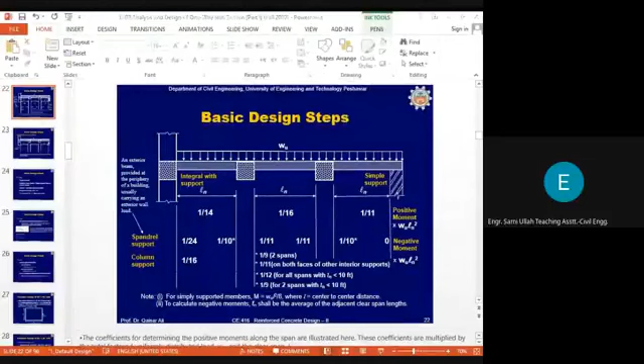Provided that the beam is subjected to uniform distributed load, just like this case. So for the design, you need to know the bending moment diagram at the midspan and at the support, and bending moment at the support is negative and at midspan will be positive. So for every span between the supports, two bending moment values are to be determined from the analysis.

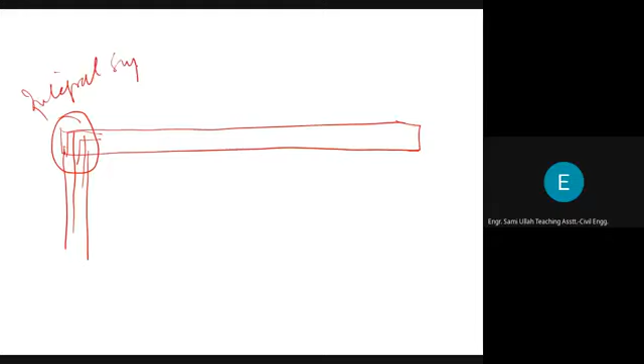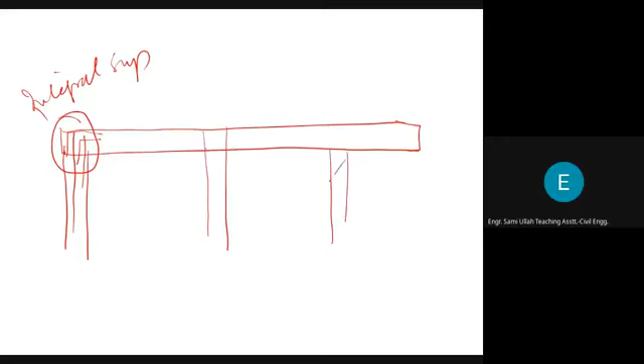Then let's say there is another column here, there is a wall here, and at the extreme end also there is a wall. So at the extreme end here, the beam is just supported on the wall. There is no connection between the wall and the beam. This is called a simple support.

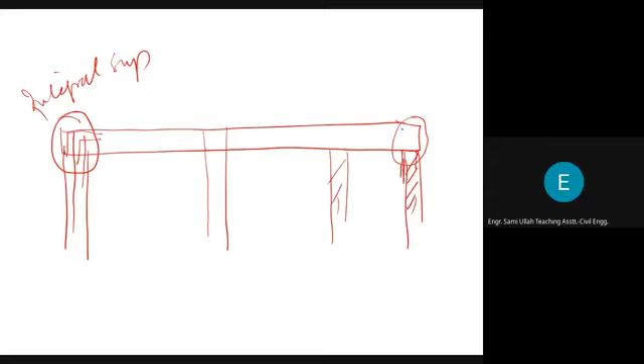This is called integral support because at the other end, the beam and column are integral to each other. The integrity is provided by the reinforcement of the column going into the beam, and the beam reinforcement coming down into the column, so that this connection of the beam and column is made integral by reinforcement continuity of one member into another. So this is integral support.

If the support is integral, for this exterior beam span, the value of the positive bending moment will be 1/14. And for this span where the support is simple, this positive bending moment value will be 1/11. The bending moment diagram will be like this.

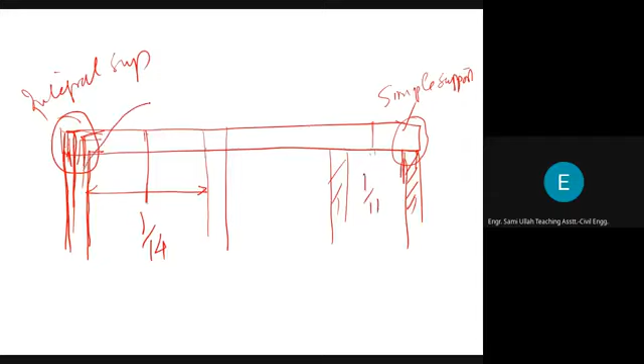There will be zero bending moment here, because a simple support or wall, the wall and beam are not integrally connected. So there will be no negative bending moment, and zero bending moment here, and the positive bending moment value will be 1/11. And here it will be 1/14.

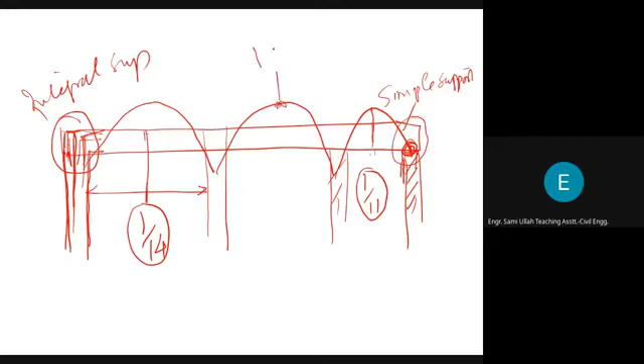Anywhere in between, for all interior supports and all interior spans, the value of positive bending moment will be 1/16 WU L square N.

So the difference in positive bending moment for the exterior span is due to the exterior supporting system. If the exterior support is integral, the value will be 1/14. If the exterior support is simple, the value will be 1/11. And for all interior supports, for all interior spans, the positive bending moment value will be 1/16.

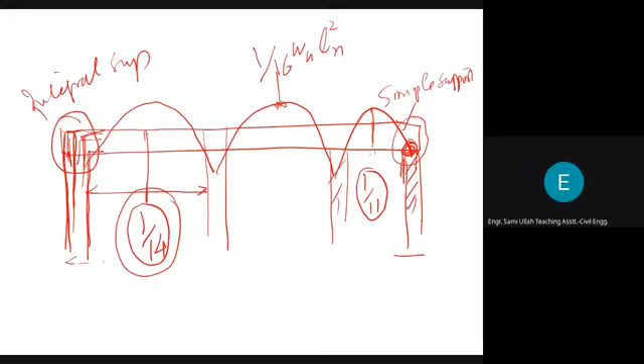I hope this is clear. Okay, if still there is some problem, you can ask again.

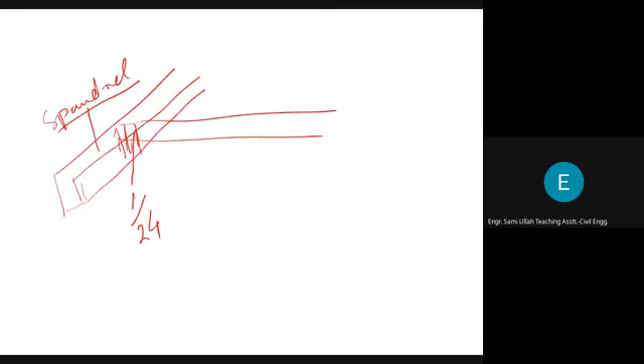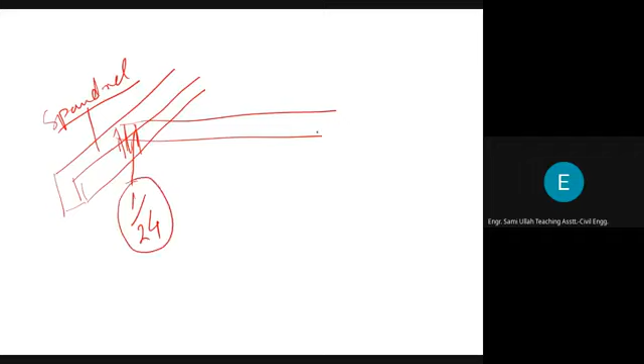And for this case, the negative bending moment value will be 1/24, not 1/16, because the extent of integrity between a beam and another beam is less than a beam into a column. So for this reason, the negative bending moment value is reduced from 1/16 to 1/24. This is called a spandrel beam, the perimeter beam.

So it is quite possible that sometimes a beam terminates into another beam instead of terminating into a column. If a beam terminates into another beam, then the beam where this connection is provided will have a negative bending moment value equal to 1/24 instead of 1/16. This is the spandrel beam situation.

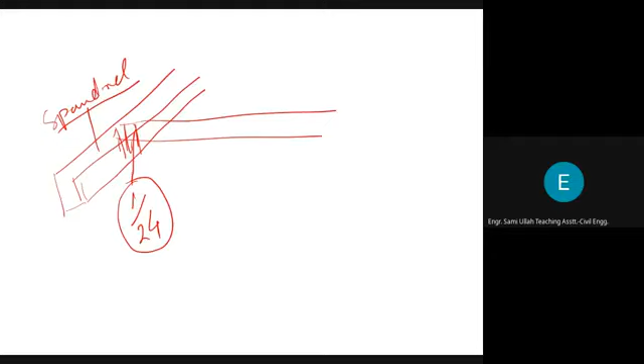Anything else on this slide? No, time, sir. Thank you, sir.

Next time, I will try to develop several situations which will almost encompass all these bending moment values for different scenarios. So it will further facilitate your understanding of these negative and positive bending moments.

And if you try yourself, develop several situations: a beam terminating into a beam, into a column, beam on the slab, and assign these bending moments to the situation you are considering. It will make your understanding better in this approximate procedure for analysis.

And if still you have any problem, you can ask questions. Okay, next, any other question please?

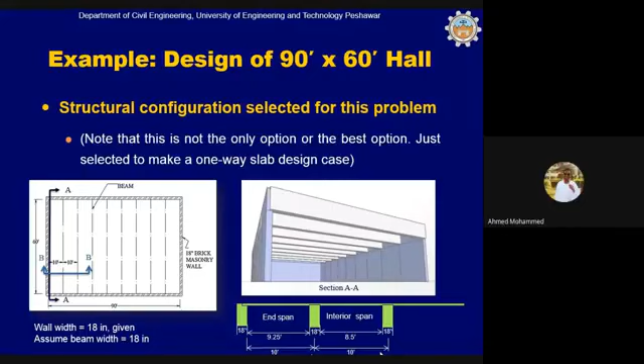Yes, this one? The first step, slide number 16. Yes, Ahmad, please ask your question. It says sizes for all structural and non-structural elements. What does it mean by non-structural elements?

Non-structural elements, yes, like walls. For example, a wall in a frame structure - when we construct and design a frame structure, the walls are non-structural elements because no load is transferred through walls, and walls just act like partition walls. So all those elements which do not take part in the load transfer mechanism are called non-structural elements, such as walls in a frame structure, partition walls, like this.

Roofs as well - what about roofs and floors? If a wall is a load-bearing wall, part of a load-bearing wall system, just like in our residential buildings and homes where the slab is supported on walls, then the wall will be a structural element, not a non-structural element. That meaning, we mean by non-structural those elements which are not transferring any loads. Yeah, you're right, okay, that's it.

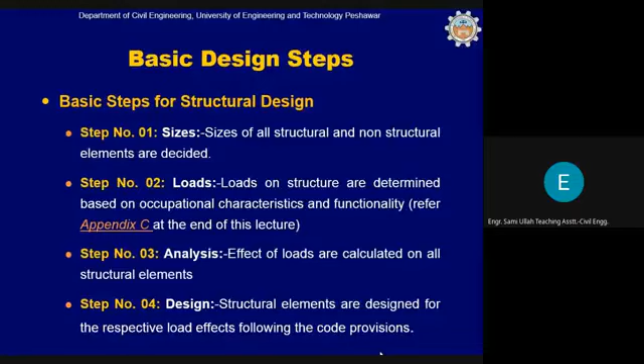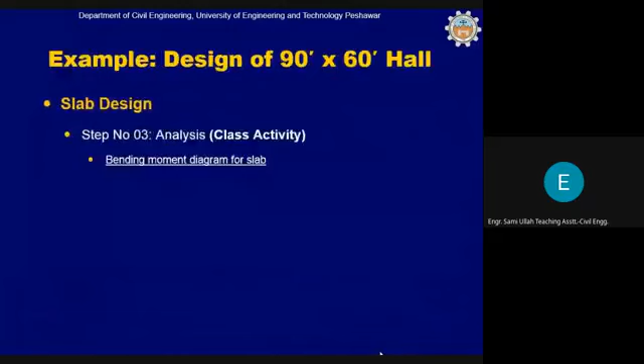Thank you sir. Yes, anything else? Anyone else with any other question? Okay, if there are no questions, then I think let's begin the remaining part of this lecture.

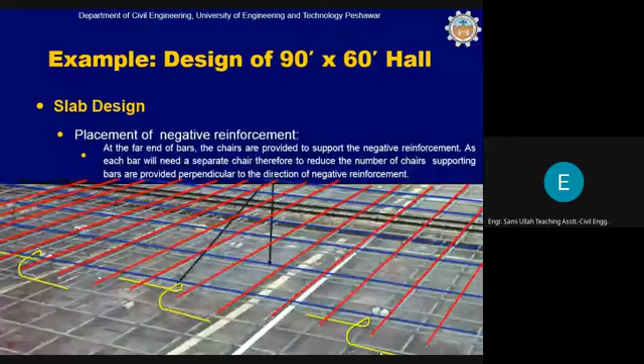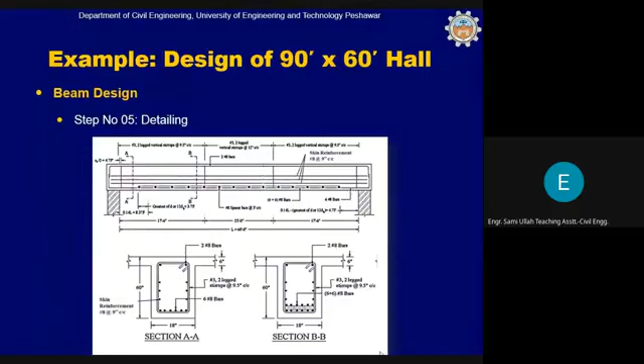Okay, so now the next part of this lecture. In this design example, which is the previous design example you already completed in the previous lecture, the beams were supported on walls. This was done to simplify the analysis. You know this was a big hall, 60 by 90 feet is a big hall, okay, and such halls are usually designed for gymnasiums and wedding halls, maybe sometimes a mosque or something like this.

And such big halls shall not ideally be supported on walls, because of the weight of the slab and the beams. You can see that the beam is 60 inches deep. Excuse me, just a moment.

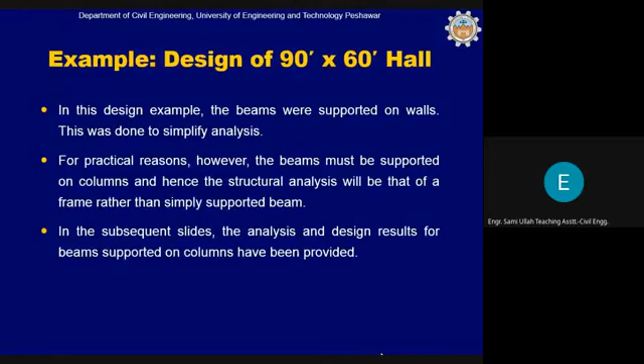So in this case, the structural system will look like this. Can you see this slide clearly? Yes sir. Okay, now what is the difference in the two cases?

In the previous case, there were no columns. These columns were not existing. The beams and the slab both were supported on walls here - there was a continuous wall here, and a wall on this side as well. So this beam we were designing was basically supported on both ends on wall, and that's why we call this a simply supported beam, and we analyze this using WL square by 8.

There will be walls in this case also, but they will be partition walls only, between these two columns - partition walls, partition walls. So the walls will not take part in the load transfer mechanism; these will be just non-load bearing walls transferring no load except its own weight to the ground. When I say they do not transfer, I mean they will not transfer any load from the structural system to the ground. The load path in this case will be like this: the slab load will be transferred to beams somehow, and then this load will be transferred to the column, and from the column the load will be transferred to the footing foundation, and from the foundation to the ground.

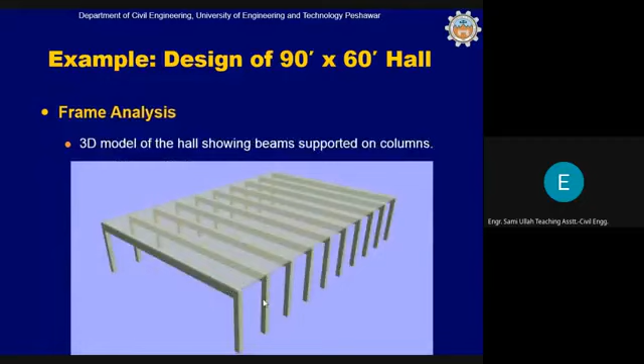However, there is a difference in the column and beam analysis. If we convert this 3D system into a 2D frame, it will look like this: a beam resting on two columns. Center to center, the distance of the beam is 61.5 feet, and WU, the ultimate load on the beam, will remain the same because we are only changing the supports - it will be 3.355 kip per foot.

Now, will there be any change in the analysis and design of the slab? I'm asking this question from you. Will there be any change in the analysis and design of slab? There will be no change, because the length of the slab is the same and the support conditions are almost the same.

There will be change only in the analysis of the beam, because the support for the beams is being changed. In this case the beam is supported on columns, and the analysis will be done using frame analysis. You would have several times analyzed single bay frames like this, with a beam subjected to uniformly distributed load, resting on a column. You can use any method of analysis for this, but you should use the exact method of analysis, not the simple approximate method.

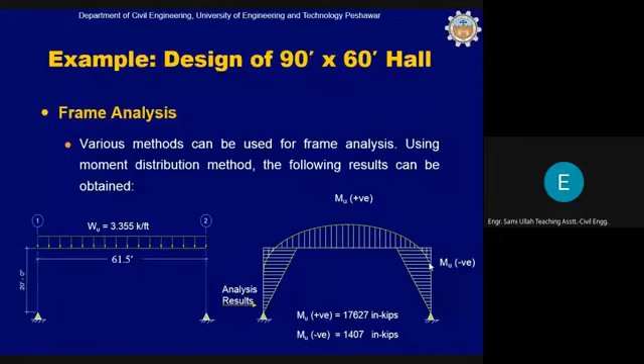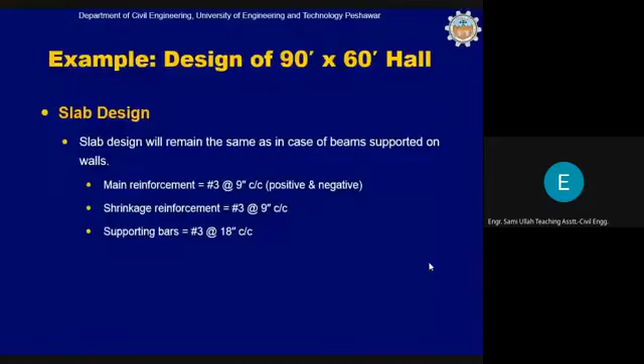We will just quickly go through the beam flexural design, because we have already designed the beam for positive bending moment, so it is not difficult. You already know the steps of design for positive bending moment. First of all, you will have to determine the effective width of the beam, which you have already determined in the previous case. It will remain the same, it will not change.

Just the value of positive bending moment has changed from 19,000 to 17,000, so the reinforcement will slightly decrease. And the negative bending moment value of 1407, which is at the connection of beam and column, is a new bending moment in this case, and you can design for this negative bending moment. If you do this yourself, finally you will find that for positive bending moment it is 8.68 square inch reinforcement, and for negative reinforcement it is 0.69 square inch.

Then you can use several arrangements of reinforcement. You can try 6 number 8 bars in the first layer and 2 number 8 plus 4 number 7 bars in the second layer, just to reduce some area, because in the previous case it was 6 number 8 and 6 number 8, 12 number 8 bars. In this case, since the difference in reinforcement is very small, from around 9 to 8.6 square inch, we are trying to reduce some reinforcement. So we use 6 number 8 in first layer, 2 number 8 at the corners in second layer, plus 4 number 7 bars in combination in the second layer.

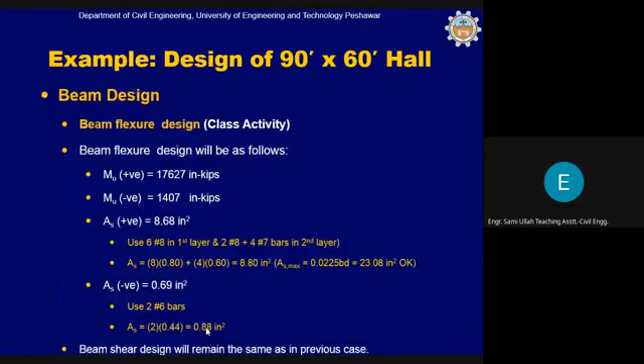Next is the design of column. From the analysis, we have calculated that at the beam column connection, there is a negative bending moment which will be transferred to the column of 1407 inch-kip, and the ultimate load coming from the beam is 103.17 kip. So the axial load diagram will be like this, and the bending moment diagram will be like this. Now we can also design this column.

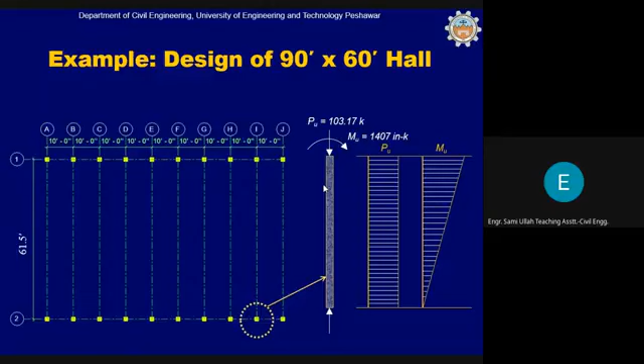The column size we've assumed is 18 inch by 18 inch, and I hope you remember this method of column design using the ACI design aid. It is very simple: you know Pu and Mu coming from the analysis. Calculate the ratio gamma for 2.5 inch cover. Gamma equals H minus 2C divided by H. C is 2.5 inch, so 18 minus 5 divided by 18 is 0.72.

So you should select the relevant design chart. Kn value is Pu divided by phi FC prime AG, and Rn is equal to Mu divided by phi FC prime. Everything is known: phi is 0.65 for tied column, FC is 3 KSI, AG is the gross area of the column, which is 18 by 18 in this case, so column size is 18 by 18. Rn is equal to Mu, the bending moment 1407, divided by phi FC AG H.

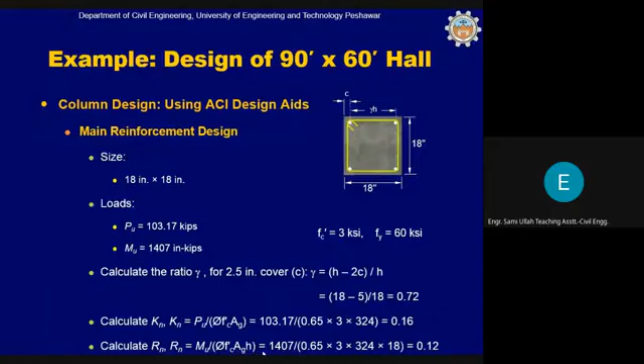So once you determine these two values, you select the relevant design chart, interaction diagram. From the interaction diagram, these two lines meet here, which corresponds to around 1%, slightly more than 1%, or exactly 1% of the reinforcement.

So 1% of the reinforcement is the minimum requirement of the ACI code. This 1% of reinforcement means 1% of the gross area of the column, and the gross area of the column in this case is 324 square inch. 1% means 0.01, so the reinforcement required is 3.24 square inch. 3.24 divided by 0.44 will give you a reinforcement of 7 bars or 7 point something bars.

As you know, we cannot provide 7 bars in a square column. We must provide a number of bars which should be a multiple of 4. So we round this to 8 bars. This will be 8 number 6 bars, and it will be like this.

3.24, if you want to calculate the area, divided by 0.44 - this is the number of bars, n. Calculate these bars: it comes out to be 7.36 bars. 7.36 bars are required, so we will round this to 8 bars.

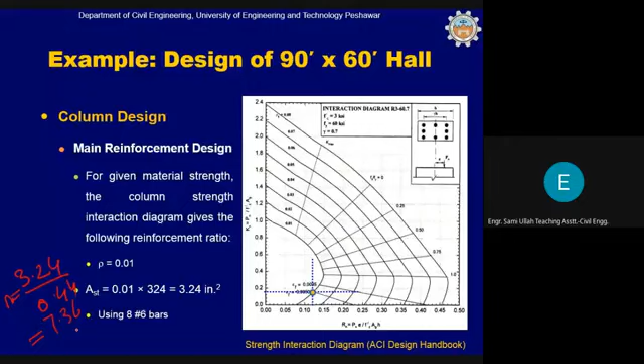Finally, we decide to use number 3 bar at the rate of 9 inch center instead of 12 inch center, further reducing the spacing between the ties.

This will be the drafting of the column: 8 number 6 bars, you can see 8 number 6 bars. Then you can also see number 3 stirrup at the rate of 9 center to center. This is the cross-sectional elevation, and this is the plan cross-section of the column.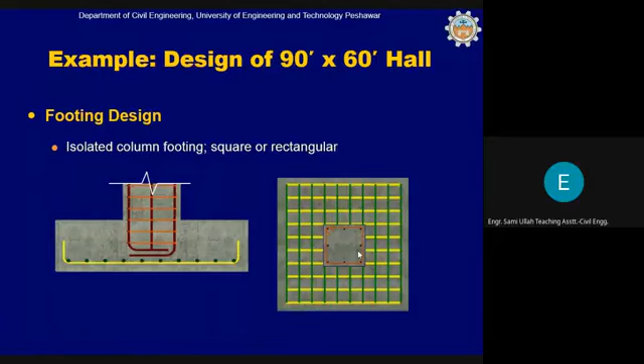A reaction at the support should be used in the design of footing - the factored load on column reaction at supports. After you finish your analysis, when you do the frame analysis like this, you will finally determine these reactions, and these reactions will be applied as load on the footing.

Okay, these reactions will come from the analysis. For the size of footing, you would require ultimate load as well as service load. The analysis is usually done with service loads, and finally they are factored to calculate factored loads and factor bending moments. Service load on the column is 81.87 kip without factors, and factor load is 103.17 kips.

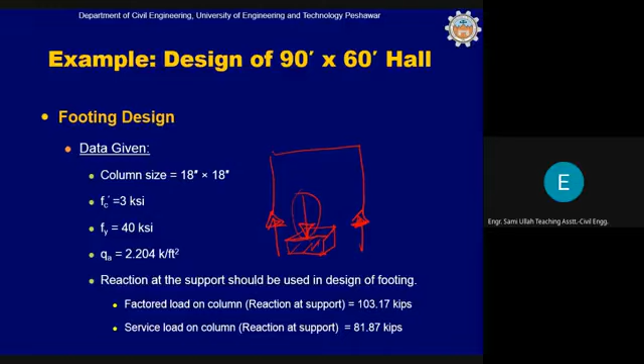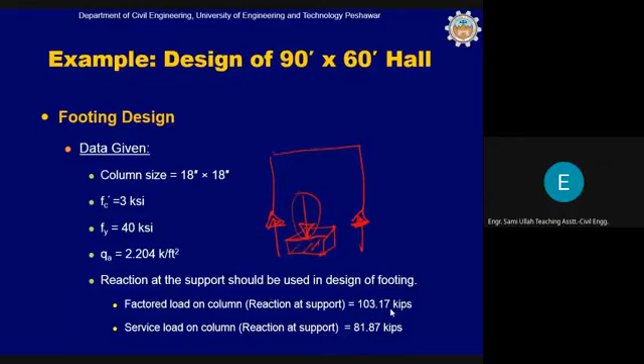In the beginning, we should assume some thickness of this concrete pad, isolated column footing pad. This H is 15 inch. If you remember in the previous course, we said that the thickness of the footing shall not be less than 12 inch because of the requirement of cover, 3 inch cover. So if 3 inch cover is required, the effective depth will be substantially reduced. For this reason, normally the footing thickness for isolated column footing is taken as 12 inch. In this case, we have chosen 15 inch thick plate, though you can also choose 12 inch thick footing plate.

The average D, why are we writing D average? Because the reinforcement will be provided in both directions, in this direction as well as the other direction. Since it's a square footing, we'll design only one reinforcement along one direction. And since the effective depth will be different, because one layer will be placed in this direction and the other layer placed on top of this, the effective depth will differ for the two directions. For this reason, we use the average, and when we calculate the reinforcement using that average, it will be provided with the same spacing in both directions.

Total thickness of the footing is H, clear cover is 3 inch, and let's assume in the beginning that number 8 bar will be used. So with a number 8 bar placed like this, the average means the contact point of these two layers. The contact point means that one complete bar diameter will be added with this 3 plus 1 inch, and this total D is 1 inch, which is the diameter of one bar. This will be deducted from this for D average. This will come out to be 11 inch.

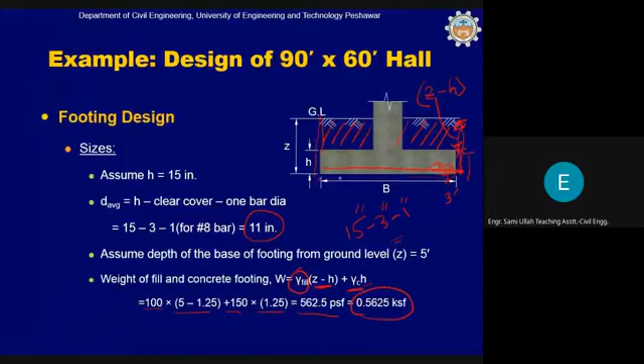And the bearing area is service load divided by QE. Service load is given as 81.87, unfactored load, divided by this effective bearing capacity. So the required area is 49.86 square feet, and the square root of this will become around almost 7 by 7 feet foundation.

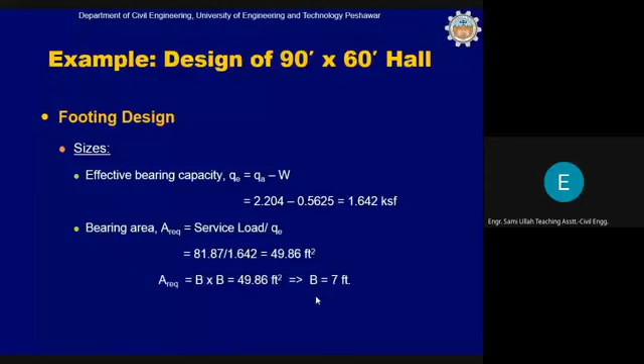Next is to determine the critical perimeter in order to confirm the thickness that we will assume, because the thickness of the footing pad will be governed by the punching shear criteria. The punching shear criteria will basically determine the thickness of the footing.

So for punching shear, this critical perimeter is calculated. This is the yellow perimeter line. We know that if column size is C, and this part is D by 2 and D by 2, then this length of the yellow side will be equal to C plus D average. There will be C plus D, C plus D, C plus D. It will be 4 into C plus D. We know that column size is 18 inch and the average effective depth of the footing is 11 inch.

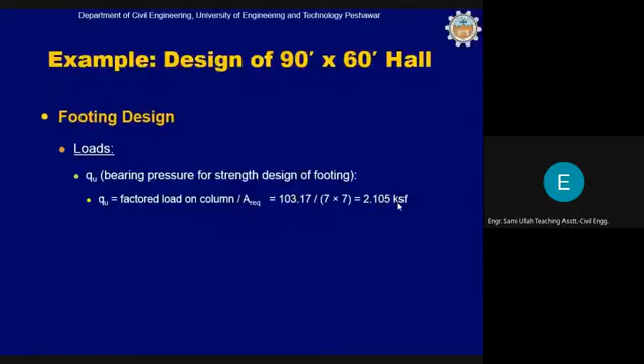By the side, because when this column takes all the load from the beam, it will transfer this load to the foundation, and the foundation pad will transfer this load to the soil. The soil, in turn, if it does not settle, will resist this load, and when it resists this load, this pad will be lifted up from the sides. Because the load is coming through the column, it cannot lift the whole column, but it can lift the far ends of the pad. So the far ends of the pad will be lifted up, giving rise to a negative bending moment at this edge of the column.

Similarly, when the column tends to transfer this load through the footing pad to the ground, there is a possibility of making a hole in this footing pad, just like a needle resting on paper. If you push a needle through a piece of paper, it is likely that the paper will be punched or a hole will be made, unless you increase the thickness of the paper. If you have considerable thickness, it will be difficult for the needle to make a hole when pushed through. In the similar manner, we increase the footing depth in order to avoid this punching of the column into the pad, or making a hole in the pad.

So this is avoided in this manner. The punching shear value can be calculated from this equation: Qu times B squared minus Qu times C plus D average squared. Instead of calculating this punching shear value at the face of the column, we calculate it at a distance of D by 2 from the face of the column, because the hole will be made at the boundary of this red area, not at the face of the column.

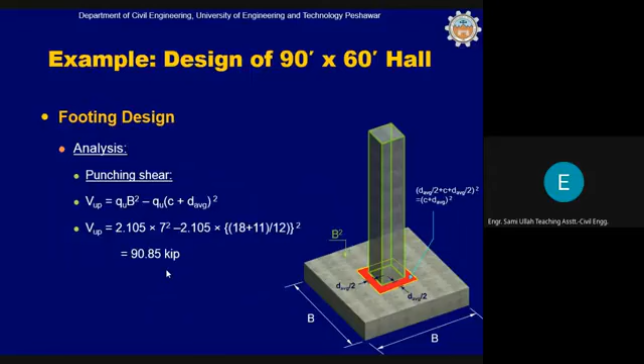The bending moment is calculated by this equation, Mu equals QuB k square divided by 2. How is this done? You know this is a square footing, so the bearing pressure per square foot is QU, and if you want to calculate bending moment at this location, we multiply this QU with B in order to calculate the bending moment per foot, load per foot in this manner. QUB, this is the load now in the upward direction.

And the bending moment will be calculated at the face of the column. So this QUB is the load acting in the upward direction, and MU here can be calculated very simply, QUB times K into K divided by 2, just like a cantilever beam.

So this bending moment is QUB K square by 2, and K is basically the distance from the face of the column to the far end of the footing, which is B minus C. B is the total width of the footing, and C is the size of the column. So K will be equal to B minus C divided by 2.

Because this total distance is B, and this is C. So B minus C will be the remaining distance, and this will be B minus C by 2, and this will be B minus C by 2.

The bending moment is calculated at this location: QUB into K square divided by 2. Because when the column tries to push this pad down, the pad will move up like this, giving rise to a negative bending moment at this location.

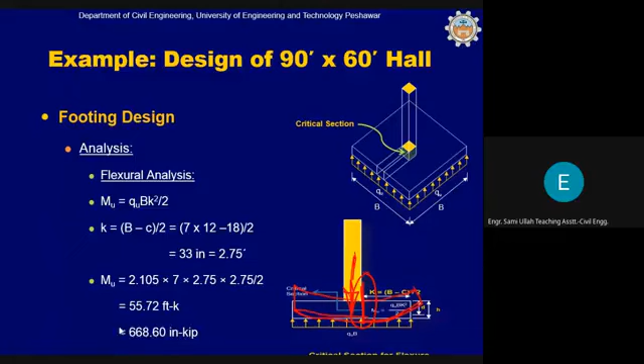B naught is calculated in the previous slides. D average is 11. Divide by 1000 will give you the value in kip. So phi 4 root FC prime B naught D average is 209.66 kip, which is greater than the VUP, the shear demand. So the assumed thickness is enough, or even it is slightly more than what should have been assumed.

So if you want to, you can reduce this a little bit from 15 inch to 12 inch. So there is a slight margin of reduction in the thickness of the footing. Anyway, we are not doing this in this example. We keep our thickness equal to 15 inch.

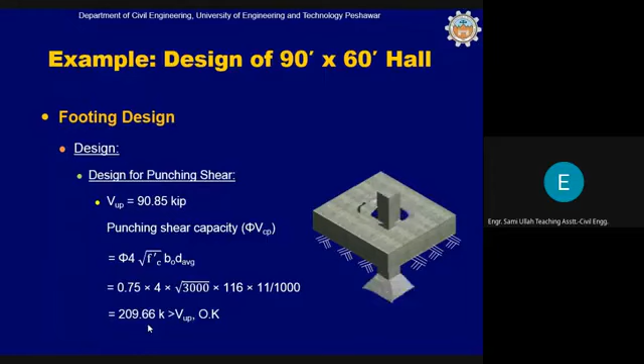Design for flexure. MU is equal to 668.6 kip inch. So assume small a equal to 0.2 into D average, 2.2 inch. AS is equal to this, similar to what we have done in several lectures. Small a, again, you can use small a, and from several trials, finally you calculate AS equal to 1.71 square inch.

But the minimum area of steel that we will be using in our examples for isolated column footing is 0.005 BD average, which gives us a value of 4.62 square inch. So the AS minimum governs, and AS minimum is 4.62 square inch.

If you remember in the previous classes, I told several times that although the ACI code allows you to use this AS minimum value equal to 0.0018, which is the minimum reinforcement value we use for slabs, from my practical experience and the experience of several other designers, in the case of isolated column footing it is better to use the minimum reinforcement used for beams, which is 0.005 BD average, instead of the minimum reinforcement of the slab, because isolated column footing has no redundancy.

This is just one column supported on this footing, and if any problem happens to this footing, then the whole structure can be in danger. So for this reason...

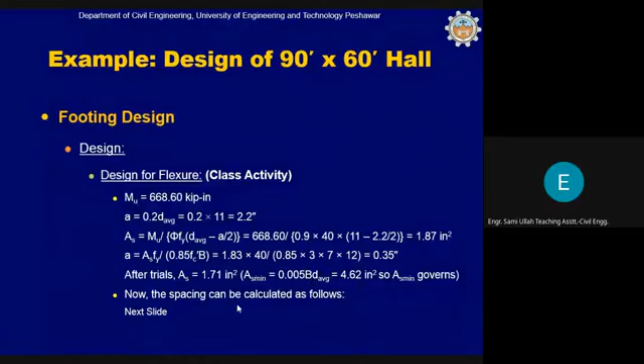So spacing: 6.5 feet times 12 divided by 5 equals 5 spacings - 1, 2, 3, 4, 5. So the distance is 15 inches center to center, and 6 bars can be provided in the foundation if placed at 15 center to center. Maximum spacing should not exceed 3h or 18 inch.

Drafting should look like this.

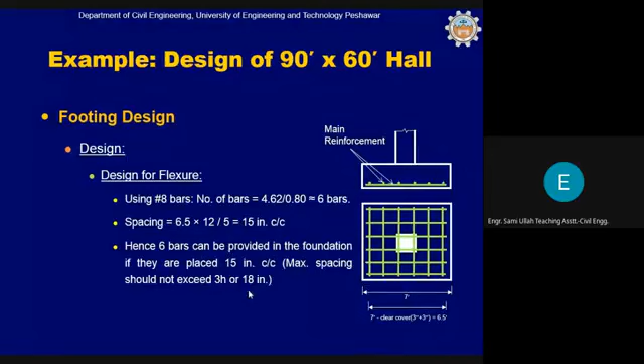Okay, now look at some practical pictures. These are our own designs that we have done. In the picture on the right, you can see beams. The beam cage has been prepared, but it has not been lowered or placed in the formwork.

So you can see that some part of the beam is integral with the slab. This part of the beam, which is around 5 or 6 inches depending on the thickness of the slab, is within the slab. So this part of the beam is cast with the slab.

These are negative reinforcement, particularly at some ends. Skin reinforcement can also be seen here, to the depth of the beam. This is the finished product - you can see the formwork is being removed. You also can see stirrups here. This is a column picture.

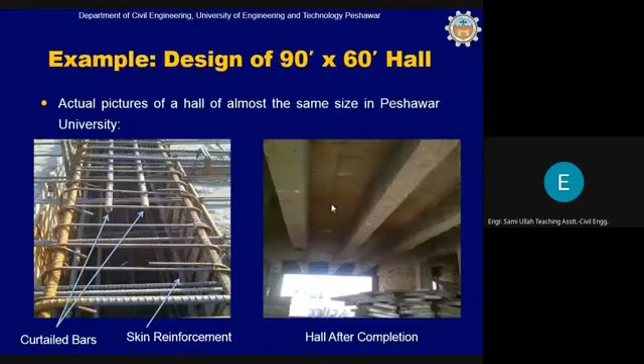Now I will show you one of the main halls that we recently designed. This is Government Girls High School, Haripur.

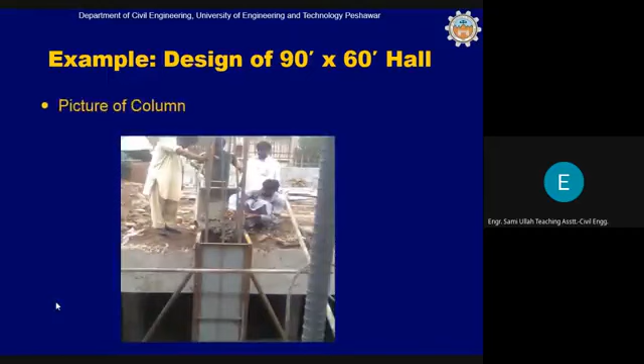Can you see these sheets? Hello? Can you see the sheets? No, sir. Okay. Total house here. Whole screen. Interesting.

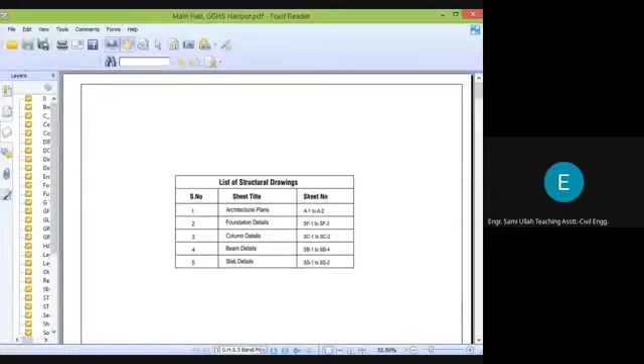Hall size is 40 by 70 feet instead of 60 by 90 feet in our example.

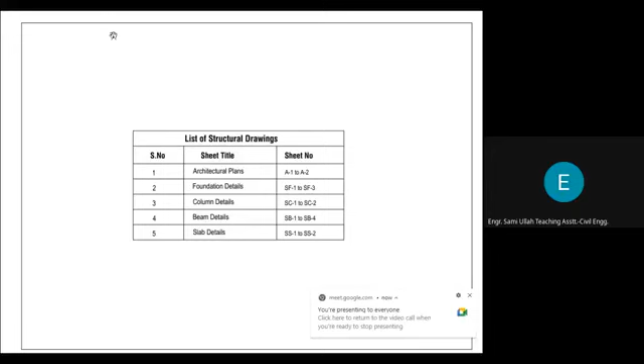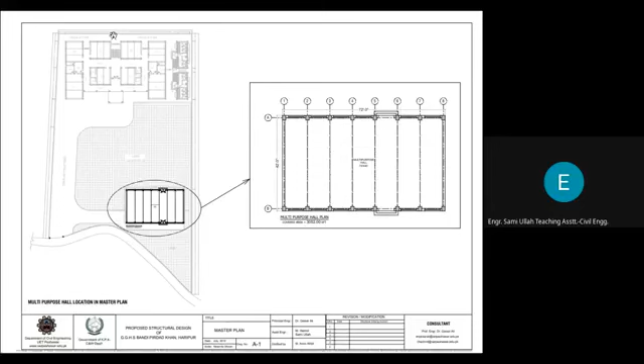This is the excavation plan, foundation plan. In this case, we have provided a continuous foundation instead of isolated foundation, because the columns are closely placed such that two isolated column footings were meeting with each other. So instead of providing them separately, we provided a continuous footing like this.

Reinforcement is provided in this manner. This is the column reinforcement - here we have provided 12 number 6 bars. The plinth beam has been provided.

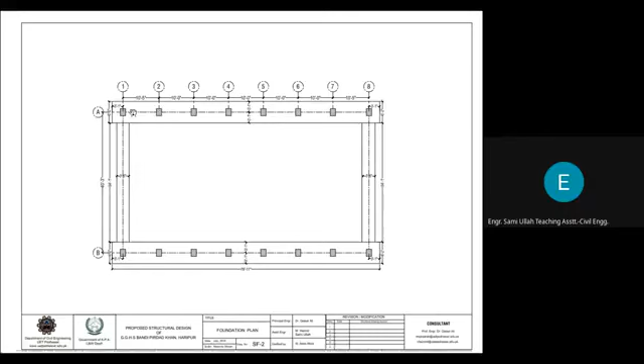These are the beams now, provided in this manner. You can see the beam with skin reinforcement, and you can also see the positive reinforcement here.

Instead of 12 number 8 bars, in this case we have provided 1, 2, 3, 4, 5, and 2 - 7 number 8 bars. This is because in our example case, the beam was 60 feet long, while here the beam is 40 feet long. So 7 number 8 bars have been provided with skin reinforcement.

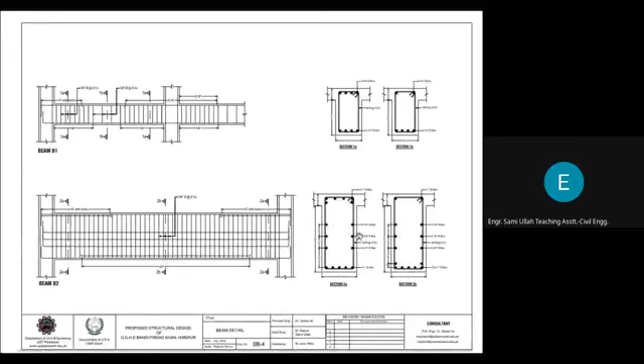Slab reinforcement is almost the same as we provided in our case, with the only difference that we have provided half-inch bar instead of 3/8 inch bar. This has a practical reason, because sometimes the availability of 3/8 inch bar becomes a problem. So we have recommended half-inch round bar and not 3/8 inch bar, although we could also recommend 3/8 inch bar.

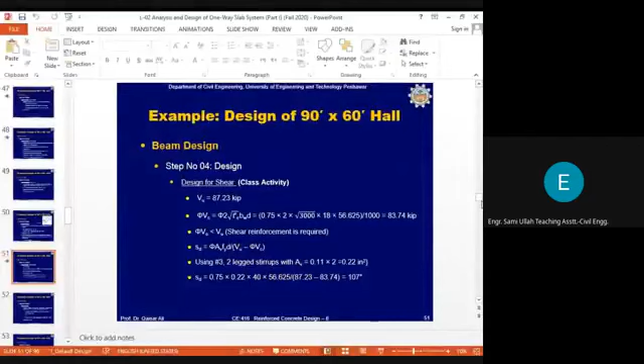Okay. Do you have any question now? Yes.

In the next few slides, we are going to discuss some case studies. You would have seen two different scenarios: one where the slab and beams were supported on walls on all sides, and another where the beams were supported on columns. In both cases, the distance between the beams was 10 feet, center to center. You can ask why the distance between the beams is kept as 10 feet. Why not 9 feet, 12 feet, 15 feet or so?

Because in the beginning, when you start assuming a structural system configuration and provide beams at certain spacing, you need some guidance for that, and this guidance comes from experience. I will share with you next slides where you will see what happens when we increase or decrease spacing between the beams, because this whole design depends on the spacing between the beams. So in the subsequent slides, two case studies are carried out to investigate the variation of moments in beams, moments and slab thickness due to change in spacing between the beams.

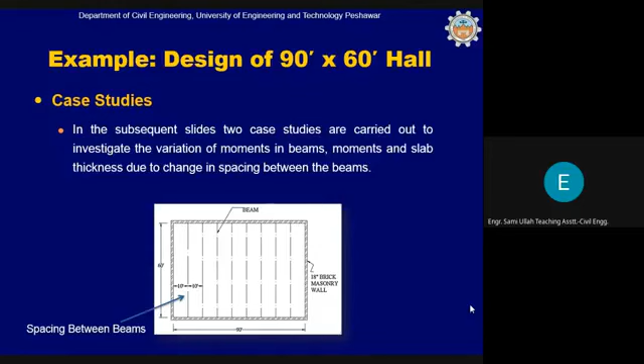Case study number 1: variation of slab thickness and moments versus spacing between the beams. Now look at this carefully. We are changing spacing between the beams from 10 feet to 20 feet. This was the case that we have completed right now. If we increase the spacing between the beams from 10 to 12 feet, then the slab thickness will change from 4 to 4.8 inch. Bending moment in the slab will change from 19.97 to 29.5, and obviously it will increase because we are increasing the distance between the beams, which increases the slab span.

The span of the slab increases because the distance between the beams gives us the span of the slab. A slab rests between the beams, so when we change the spacing from 10 to 12 feet, the span length of the slab increases, and the thickness of the slab depends on the slab span. So the thickness will increase, the bending moment will increase, the area of steel will also increase, and the spacing between the reinforcement will decrease.

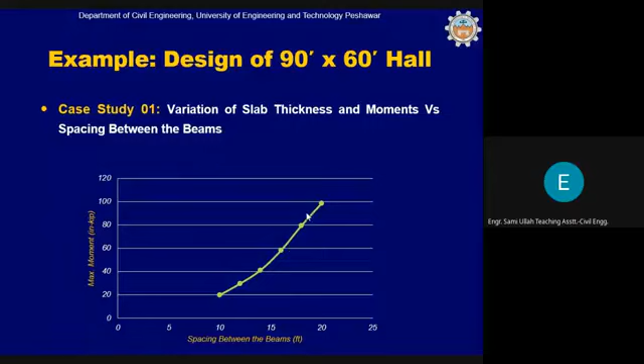So these case studies will enable you to understand the difficulty in increasing spacing between the beams. If the spacing between the beams is increased, then the demand on the slab will increase, the demand on the beam will also increase. So we must select a compromising situation.

You have to decide a compromising situation. If we keep the spacing too small, then there will be too many beams and too much reinforcement. If, on the other hand, the spacing between the beams is too large, then the number of beams will be less, but every beam will have a lot of reinforcement. So we have to find a middle way between these two extremes.

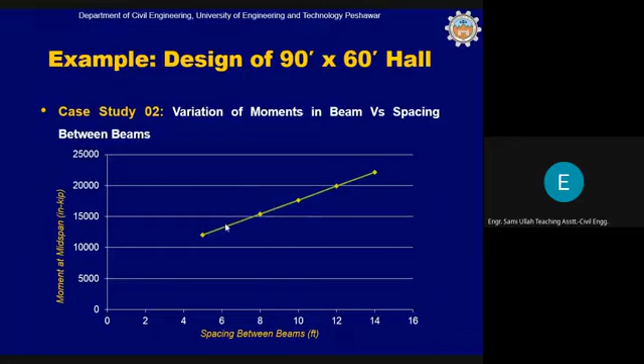And moments in the slab increase by increasing the spacing between the beams. This is also very obvious, because by increasing the spacing between the beams, the load on the beam will increase, because it will have to support now more part of the slab. And moments in the beams also increase by increasing spacing between the beams.

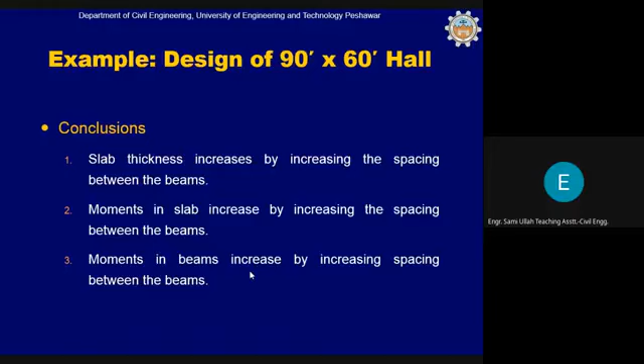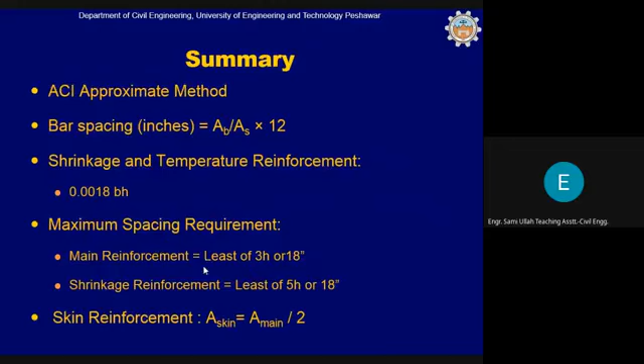No, please, who are you sir? I am Ahmed. Yes please, Ahmad, ask your question. But speak loudly, okay? Loudly and slowly. Okay, no problem. Sir, in the beginning you explained to us the integral support between column and beam, and also the simple support between column and beam too. But within the lecture, you showed us that in real fields there is an integral connection between slab and beams. Can you explain that situation and why? Yeah, this is very simple. A slab finally terminating into a beam is a very usual situation. I can explain this. Yes, please sir.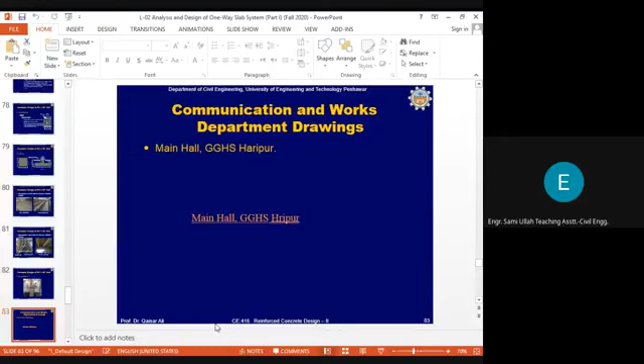No, but if the slab reinforcement is terminating in a beam, and below the beam there is a wall, then in that case the wall is not integral with the beam and neither with the slab. The wall will more likely be a non-partition, non-load bearing wall, a partition wall in that case.

There is no such situation where all three—slab, beam and wall—are integral. It is possible, but only if the wall is concrete. If the wall is concrete, then the wall reinforcement will be extended into the beam reinforcement, so the wall will be integral with the beam, and the slab will be integral with the beam. So the slab is integral with the beam, the beam is integral with the wall, and the wall is concrete. But if the wall is brick masonry, then brick masonry has no reinforcement, so the connection between the brick masonry wall and the concrete beam is not possible.

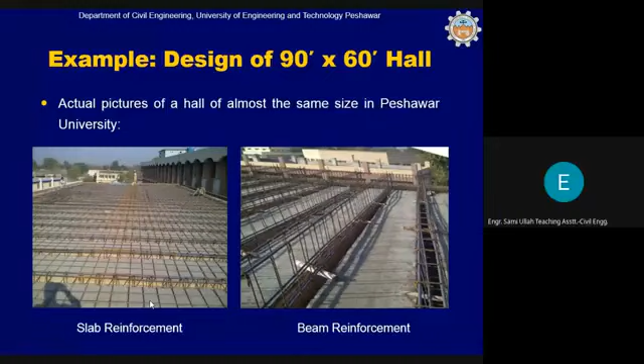Hello. Okay, sir. And similarly, the reinforcement is already minimum.

So further reduction in the spacing between the beams will not change the reinforcement. It will have the least advantage to us in terms of slab thickness and reinforcement in the slab. However, it will have an advantage in the beam reinforcement.

If you look at the next slide, from 10 feet, when we reduce the spacing to 5 feet, there is a substantial decrease in the slab and beam bending moments and the beam reinforcement, though there will be no change in the slab thickness and slab reinforcement.

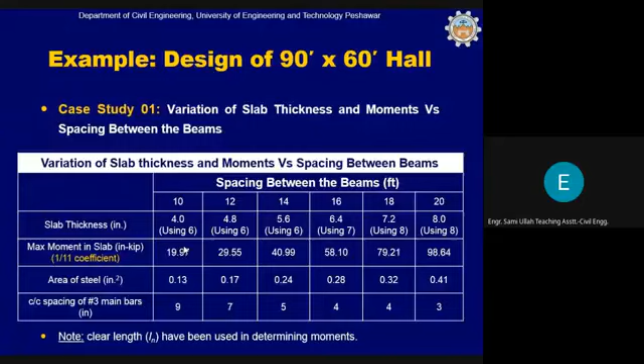Okay, yes sir. Thank you sir. Anything else? Yes, please. Any other question? Yes sir, I have a question. Who are you? Zakaria Khan, sir. Please ask your question.

So can you give me time for the next lecture? I will explain this, please remember this question. This is a very important question, and if you have other questions similar to this one, try to understand the concept of supports in practical situations, isn't it? Please remember this question and ask it again in the next lecture, okay?